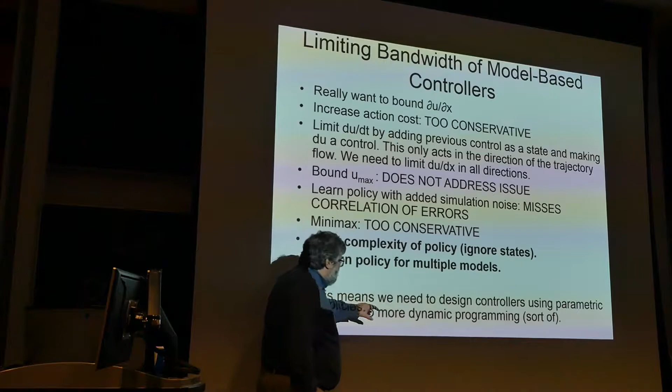What I'm going to advocate is what we should be doing is design policies for multiple models. If you design for a set of models, then hopefully you will be robust across that set. An implication of this is we have to use policy optimization, no more dynamic programming, and no more trajectory optimization, because what we're optimizing are parametric policies. And the way you do that is incredibly simple.

If you had a single model and you wanted to try out a policy, you'd run it for a certain amount of time. Maybe you'd pick a set of initial conditions and run them from all the initial conditions and average or add up all the costs. And all I'm saying is, in addition to doing that, you should sum over a set of models. Now, this is a weight that depends on how much you care about the model and the starting point, and this is a notation of the cost given a particular model with that starting point and this vector of parameters.

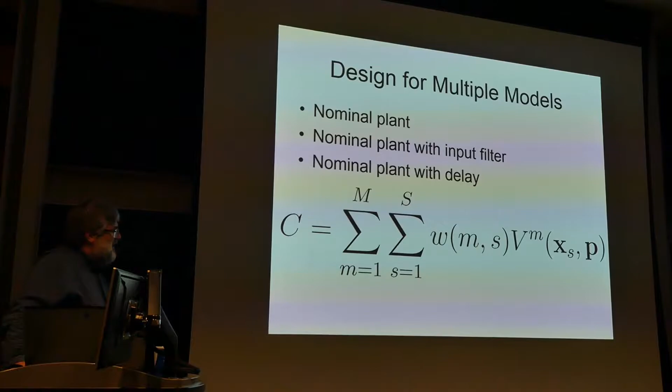And as long as there's a finite weight on all the models, yes, you can get into a fixed amplitude oscillation or something like that, but none of the models are going to blow up to infinity.

So can I ask you, now you made a big change. We went from trajectory optimization, right? Our initial and final state that we're trying to... Correct. To having a general policy. I still have a question regarding the trajectory optimization part. Do you think that if we just learn local linear models of the environment, we initialize them with local linear models, and then we try to use the learned model instead of the structured model we imposed, which may be wrong? Do you see what I mean?

You remember me swinging that thing up? That's what we were doing, learning local linear models throughout the space and then doing trajectory optimization through it. And clearly that works. It has a couple bugs. You can get into a situation where your action generates new knowledge that does not change any of the models you were actually using. So you keep doing the same thing over and over again, and so you get stuck.

A way to fix that is to add in a little bit of model-free learning where you basically use the error to directly drive or explore to generate a new command. And that usually gets rid of the problem of getting stuck. So mostly model-based learning with a touch of model-free learning is a good combination. Okay.

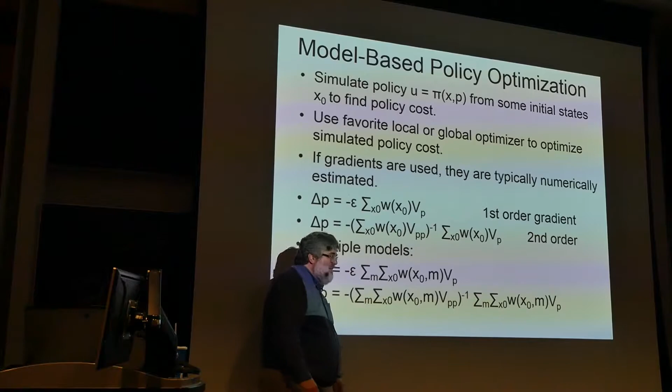So we're interested in doing this model-based policy optimization with sets of models. We can compute numerically a first-order gradient and a second-order gradient, or we could use a non-gradient optimization algorithm such as something called CMA-ES, which is very popular. The only change we do with multiple models is we add an additional sum over the multiple models. The gradient's just a sum. And in the example I gave you, the system trained on multiple models, and the nominal expectation was you would have done that.

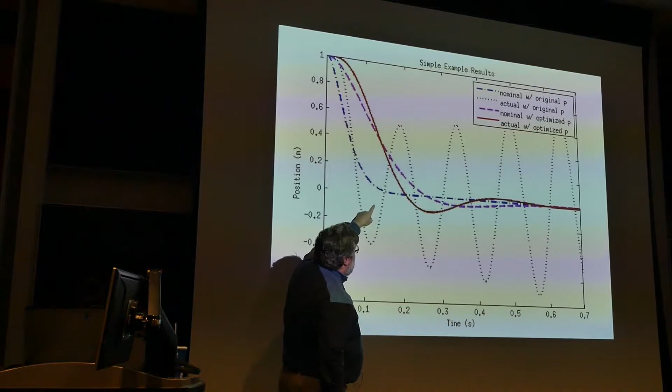When you're actually given the real system and the actuator has limited bandwidth, you do something very reasonable. You're a little oscillatory, but you're not blowing up to infinity.

Now, you might say, for n models, I have slowed down my learning process by a factor of n, which is not that bad. But if you're willing to use a model-based trajectory optimizer called differential dynamic programming, which is the granddaddy of iLQR and a lot of other algorithms, which are basically reinventions of differential dynamic programming, you can analytically propagate gradients very efficiently with local linear models. And you can handle constraints.

I'll put these slides on the web. I'm going to flip through these very quickly. You can actually compute second order derivatives or Hessians in order to do second order optimization. You can regularize these things. When you know your model's bad, you can actually add additional quantities to the second order optimization process so that you're conservative when your model is bad, which is a good thing to do.

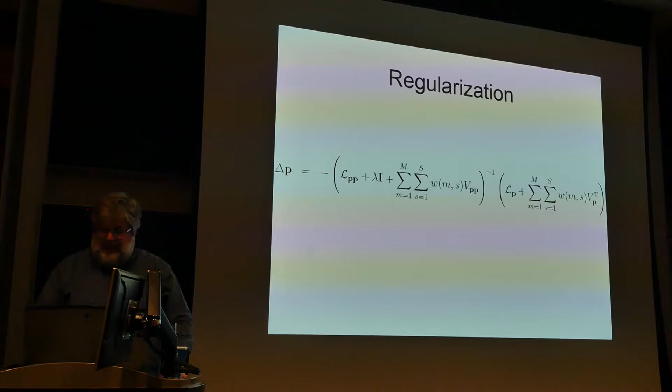All right, I'm going to skip some examples. There was a quick example where we had a linear, quadratic, bilinear regulator. I'm just going to skip that.

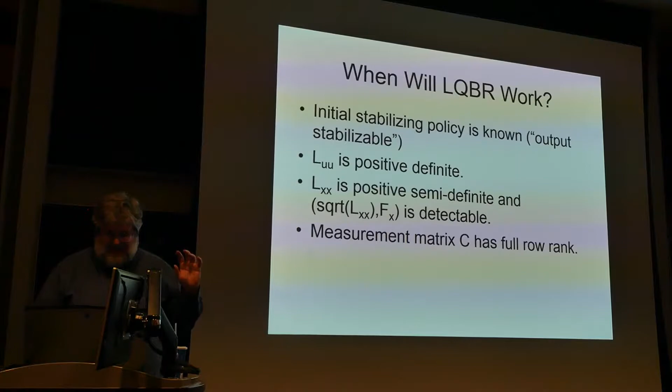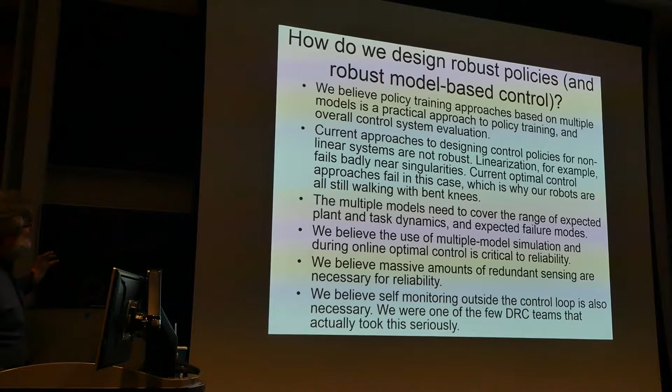Okay, so here is our manifesto about making robust policies. We think training on multiple models is a good way to go. I highly recommend it. A lot of alternatives, like finding ways to invert or cancel the nonlinear dynamics of a nonlinear system, are simply bad ideas. You need to choose the set of models you're going to optimize over very carefully.

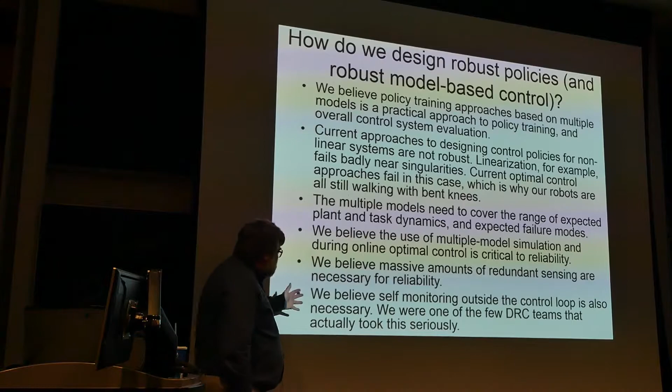We also believe massive amounts of redundant sensing are very good for reliability, and self-monitoring is also very good for reliability. We were the only team in the DARPA Robotics Challenge that did not fall down and did not need to be rescued by humans, and tried all the tasks.

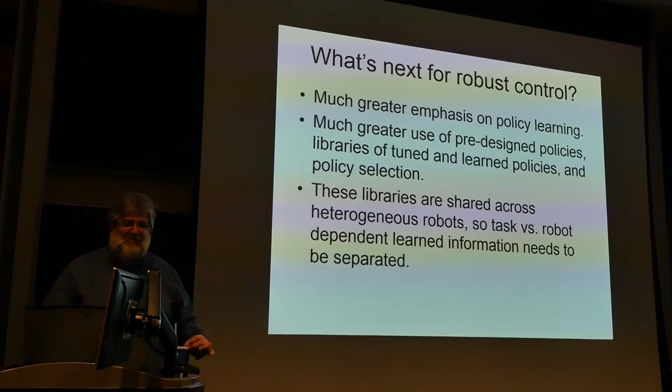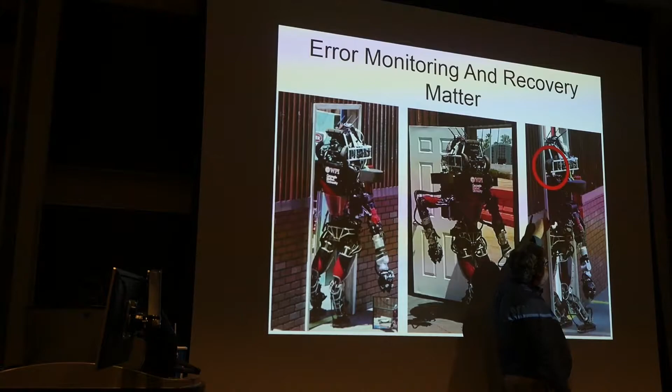And the only reason we did not fall down was we had a separate process that was looking for screw-ups. And when it detected a screw-up, it froze the robot, and the robot asked for help from the remote operator, which was allowed. So for example, the robot's trying to go through the door. Most of the time we went through okay, but one time the protective cage around the head hung up on the door frame. We detected that.

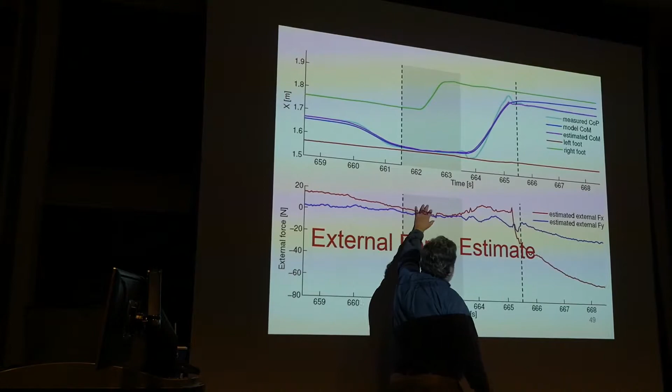So when that happened, we're always estimating an external force on the robot. That should be close to zero because we don't believe anyone's pushing on the robot. And when it suddenly changes, freeze the robot.

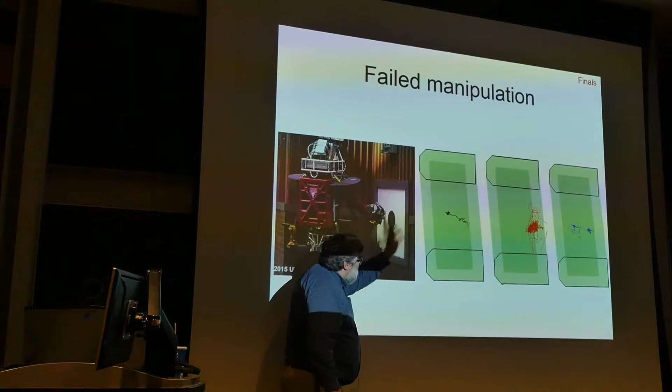Another thing we did, we were trying to drill a hole in the wall. Our wrist broke. The robot started pushing too hard. This is what's called the center of pressure. This is the polygon of support. Going outside the green area is bad. We detected that the center of pressure was going outside the green area.

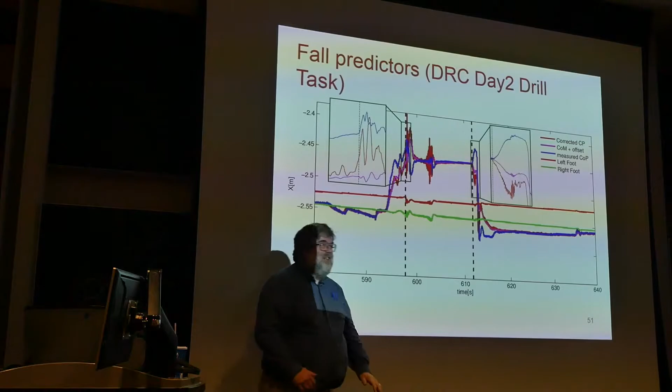We froze. While the humans were scratching their head, the robot's sort of on the edge, sort of wobbling like this. And then the human said, okay, here's what to do, and we got it balanced again. And the wiggly lines looked like this, and basically we expected that increase, but we didn't expect those spikes, and we froze the robot.

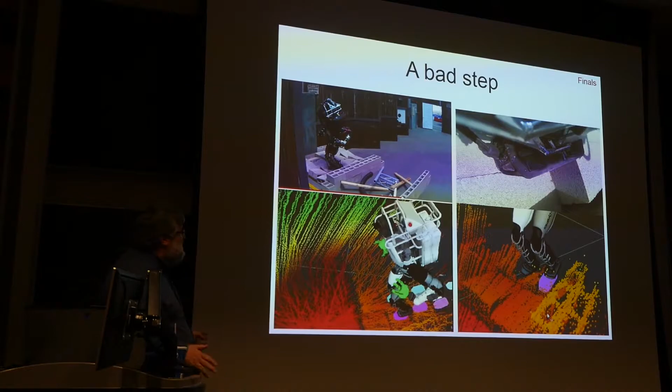Here's another example. The robot's walking across a bunch of cinder blocks, and it places its foot so the toe's on one set of cinder blocks and the heel is on another set of cinder blocks that are at a different height. So the foot's like this. That's really bad. Again, we detected, wow, this is not what we expected. Freeze the robot, ask for help. So don't just think about how to design a controller. Also think about how to monitor yourself for errors.

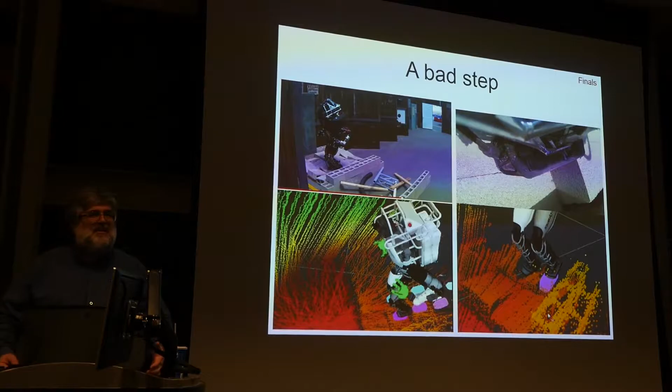Okay, now in the final section of the talk, I want to talk about what I think is the most important learning problem. And I feel it's pretty much totally ignored. And it boils down to finding better ways to do behaviors that are somehow easier.

When I was in high school, my math teacher said that I would go far in life because I was so incredibly lazy. And I spent a lot of time thinking about how to minimize the amount of work I had to do. We need lazy robots. We need robots that cheat and find easier ways to do tasks. And let me show you some examples.

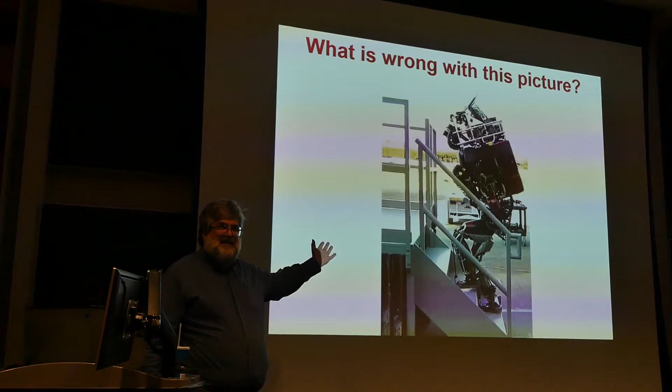This is a picture of our robot from the DARPA Robotics Challenge. We successfully walked up these stairs. This is the end of the run. We're totally happy. What is wrong with this picture? Even drunk people know to use the railing. Okay? Now, it's not that I like to dump on MIT.

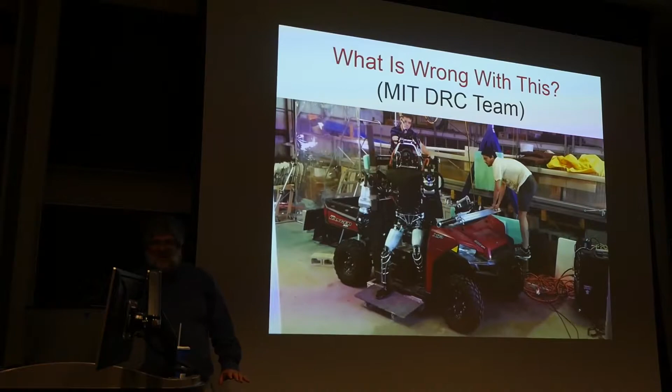The MIT team put out this video showing their robot stepping out of the car onto the platform and eventually here. I don't know how long you want to watch this. It's a little weird, kinky. The graduate students are jumping up and down, the vehicle's shaking, and the robot is very slowly standing up, and eventually gets her feet here, and eventually steps down here.

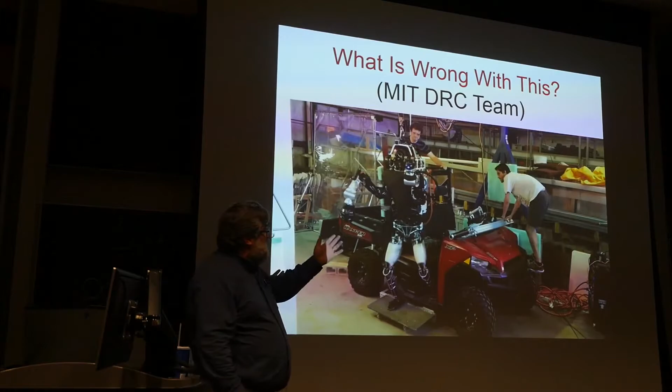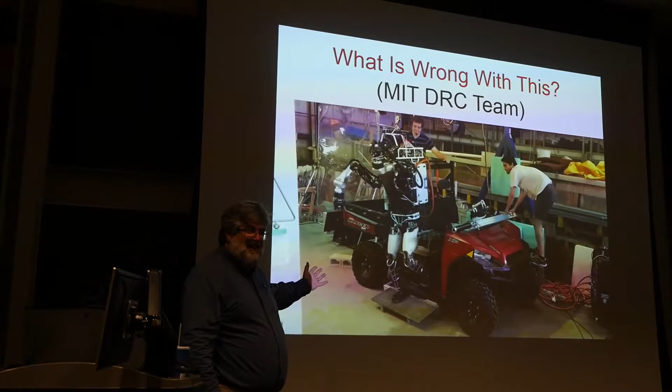This is an incredibly impressive demonstration of robot control. The thing can stand up and even move when the floor underneath it is shaking. It's amazing. These guys probably spent a year working on it. What is wrong with this picture? There's a handle. They put a handle right there.

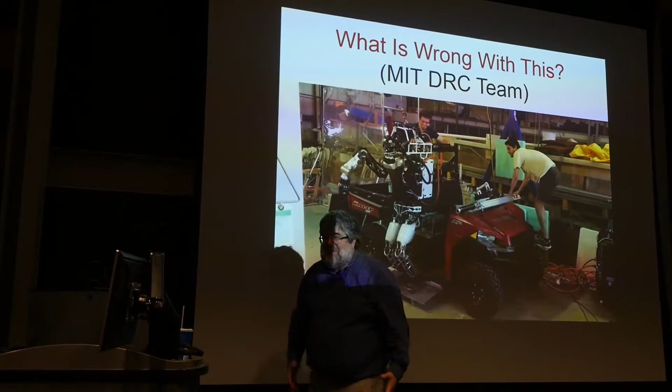It would have been so much easier if the robot just grabbed the handle. You don't have to have a $2 million robot. You don't have to have graduate students jumping up and down on the car. You don't have to have exquisite control. Just grab the handle. Okay.

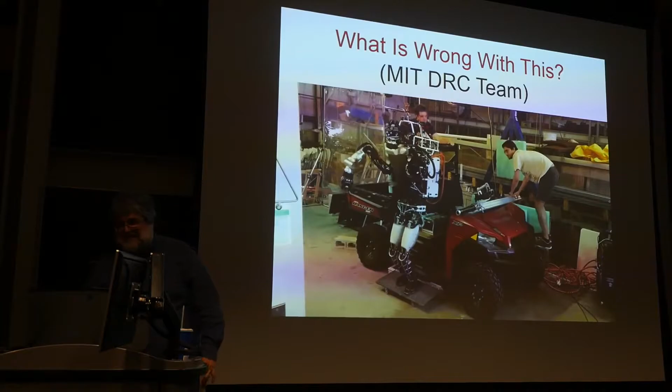A shocking fact is that no robot grabbed railings, walls, door frames, or anything else in the DARPA Robotics Challenge. A few robots, ours included, did touch things in order to get out of the car. We flung ourselves onto the hood of the car. But it's shocking that all these people work so hard to do things the hard way.

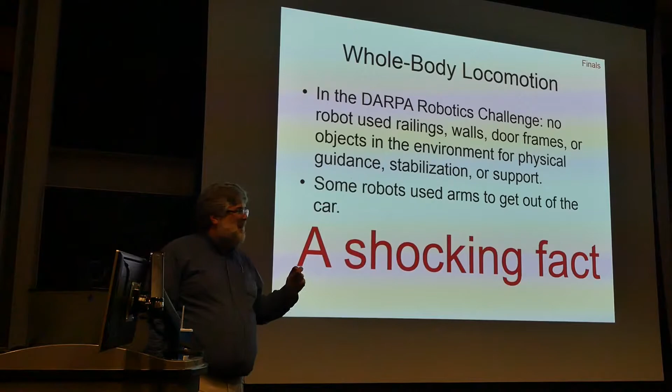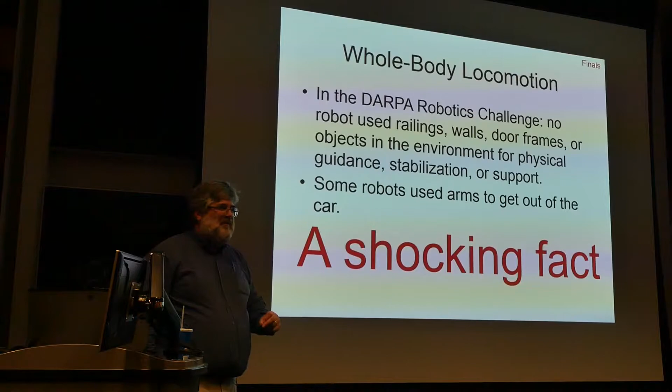And if robots could look at a problem and say, oh, the easy way to do this is such and such, robots would be as good as humans. Current robots would be just fine. Our problem is robots don't have a clue as to how to find the easy way to do something.

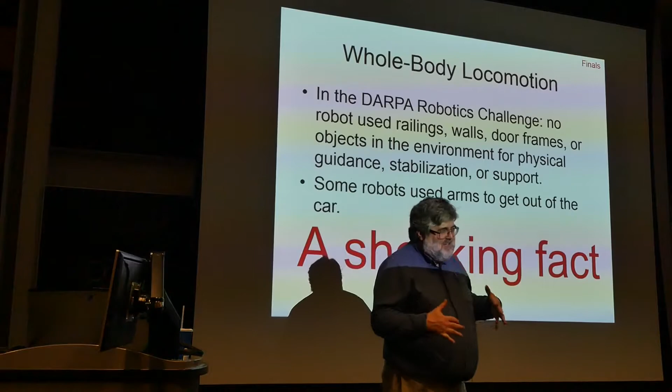Because I think this is the most important problem, I think all of you as graduate students should be working on it and drop whatever else you're doing. This is really the most important thing.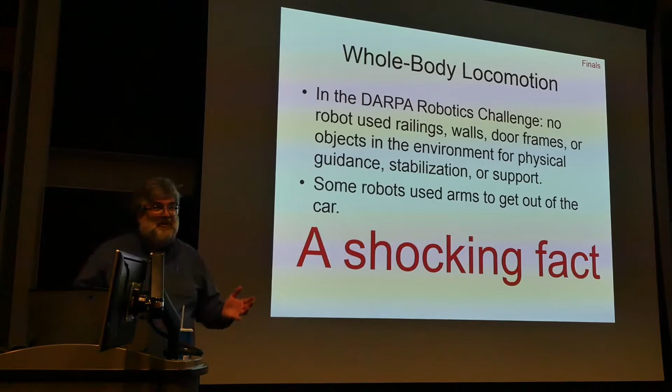Now, this may not make sense to people not from the United States. We used to have a television show called MacGyver. Recently they revived it, so I believe it's still on. MacGyver was famous for improvising ways to do tasks. And what we need to do is get a MacGyver robot. If you do anything with deep reinforcement learning, figure out how to do this.

There's just all these tricks - binder clips to hold your cords. If your screw is stripped so your screwdriver can't turn it, put a rubber band between your screwdriver and the screw. Works like a charm. Look at this trick so you can drill holes into your neighbor's cubicle and collect the dust.

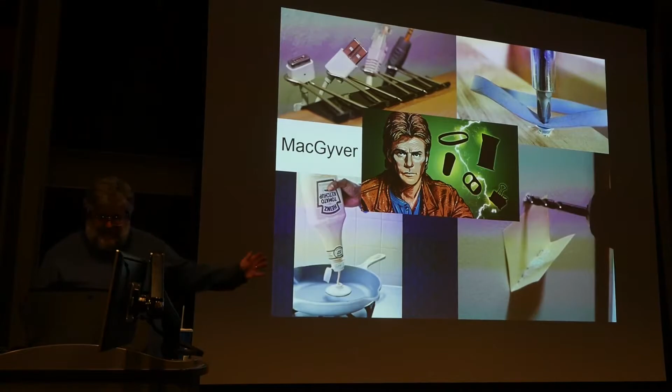That's amazing. Have you ever had the problem of putting too much pancake mix in the pan and the pancakes are too big? Put the pancake mix in a squeeze bottle and you have total control. Okay, if you're not impressed by that, here are the things MacGyver did in the original show, in the pilot.

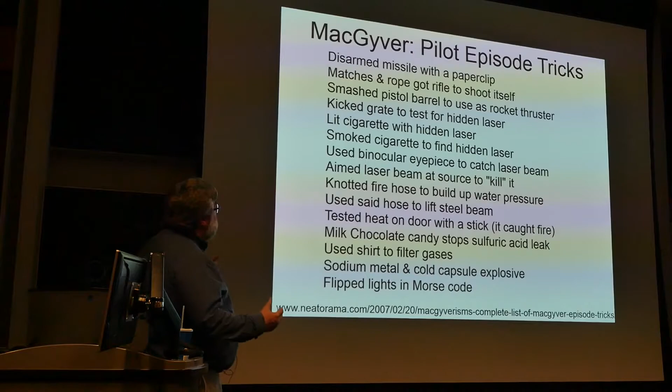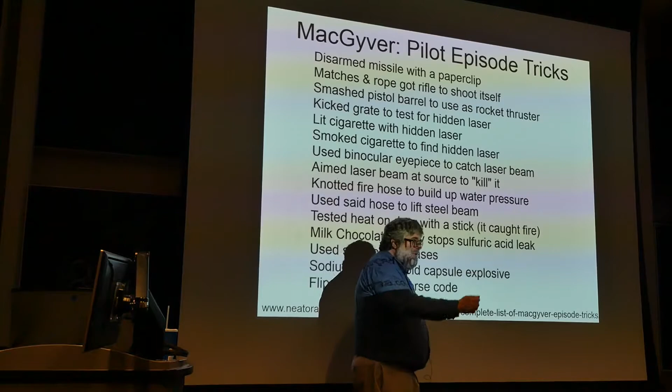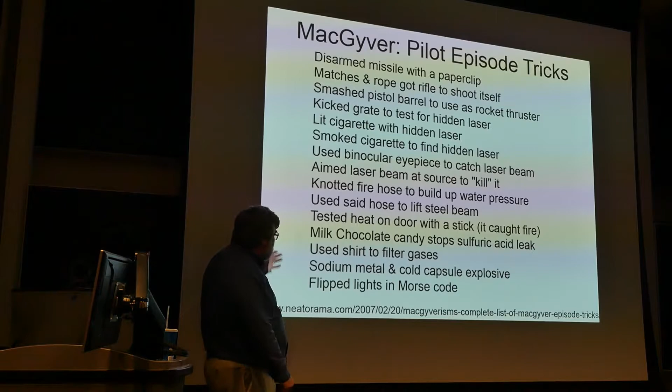He knotted a fire hose to build up water pressure and used that hose as a jack to lift a steel beam. Amazing. He tested the heat on the door not by touching it with his fingers, but by touching it with a stick. Since the stick started to burn immediately, that door was very hot. It turns out milk chocolate candy stops a sulfuric acid leak - who knew that? He used his shirt to filter gases, created an explosive out of sodium and a cold pill, and flipped lights in Morse code.

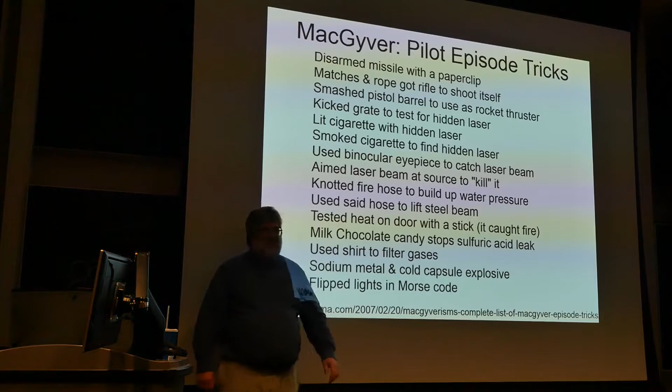And in fact, really anal retentive people have collected all the things he did in all the shows if you want to take a look.

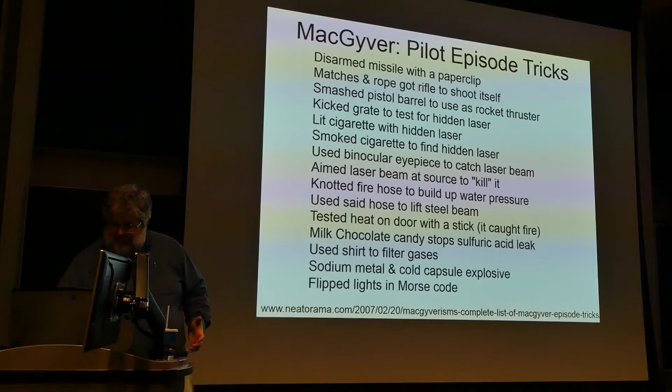Okay, so I want to explore this issue right here and now. The very tough issue we're going to talk about is how to open a jar that is stuck. Now, if you're in robotics, you'd say, well, you could use a power grip to open the jar, or you could use a precision grip to open a jar. And that's about as good as robot planning gets.

Let's talk about human planning. I want to ask you how you open jars that are stuck. So, anyone want to volunteer how you open a stuck jar? How do you open a stuck jar? Bang on the lid. Okay, bang on the lid. So my list of questions are: did you invent that strategy? Where did it come from? Where did I get it from? My mother. Excellent. All right, why does it work?

So my theory is... your theory is... oh no, that is your theory. I'm the break the seal school of thought. Okay, yeah, my theory was that it breaks the friction seal, not so much the pressure seal.

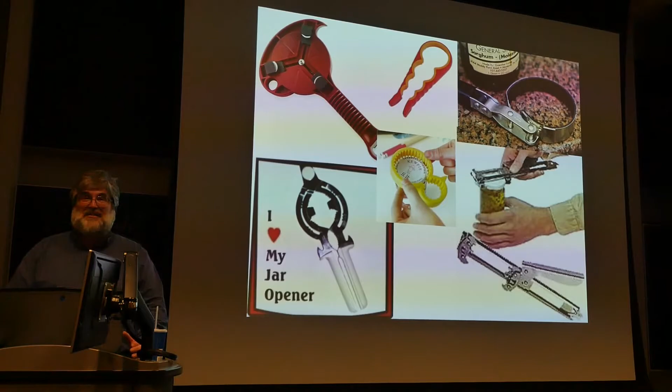There are even tools that are invented for this purpose. You can buy them. The name of this tool is a Gilhoolie. Okay.

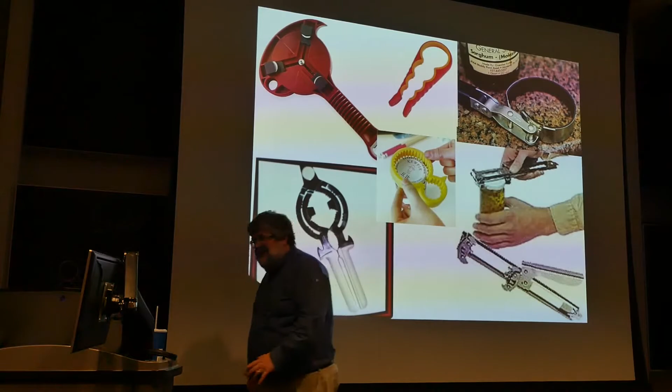You can even get power tools to do this. You know, this is from a late night infomercial. And you know, you can screw something to your cabinets to make this easy.

What's it going to take to get a robot to learn from the web and all this material? I think that's a really important question. A second question is, what's it going to take for a robot to invent these kinds of strategies rather than just learn them from imitation?

A third question is, maybe that's the wrong question. If humans don't invent these things, they learn them from other people, and we have to wait until we have an Einstein to invent a new way to open a jar, and they're very rare.

If you look at the records in sports, you will see sports records such as high jumping improve very slowly for 10 years and then jump up when an Einstein comes along and says, here's a new way to get over the bar, and then another 10 years and another Einstein comes along. People who invent new strategies are actually, I think, very rare.

So maybe that's the wrong thing to ask your robot to do. I would very much like to have a robot that could reason about physics and explain. It doesn't have to invent the strategy, but it has to make up an explanation, even if it's wrong, of why the strategy works.

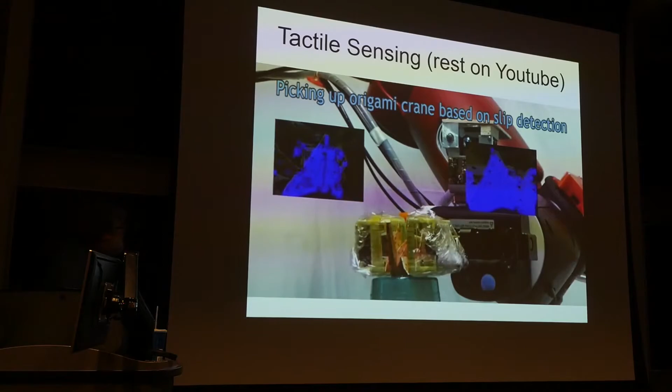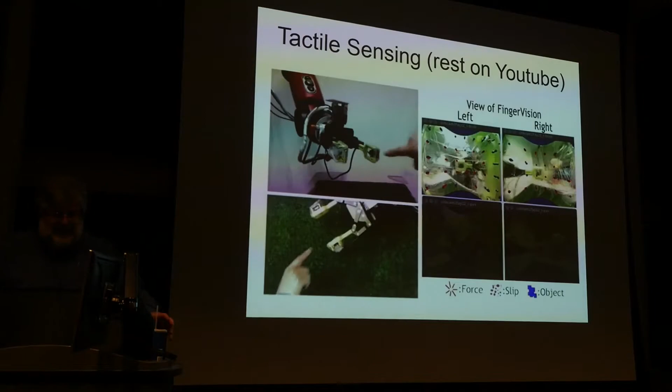Now there's a much longer video on YouTube. Here I'm showing you, yes, we can see the finger, and then when we press on it, you can measure displacement of markers, and that gives you forces.

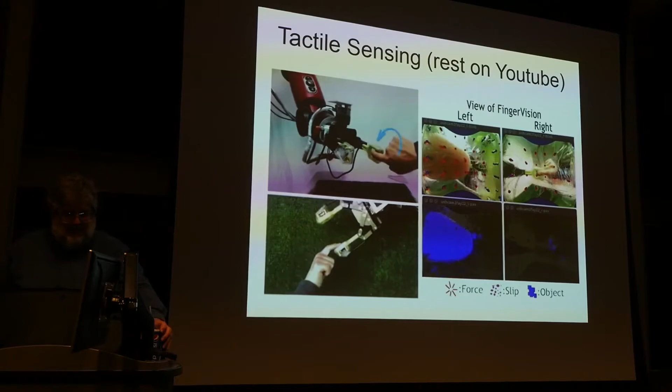You said you can pick it up because you can figure out when you're picking it up, right? That it's not slipping. You can close enough so it's not slipping, and if it starts to slip, you close more. That's a very simple algorithm. Okay, so that was my advertisement.

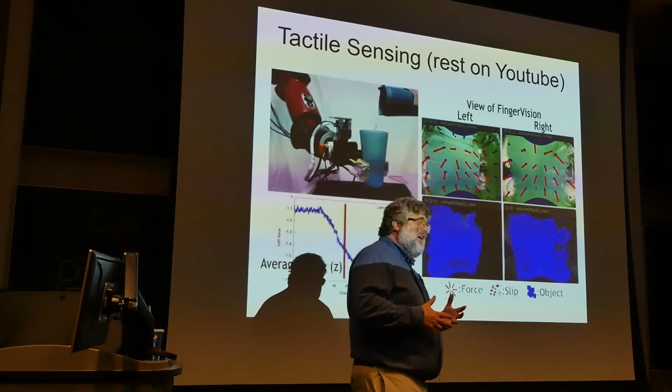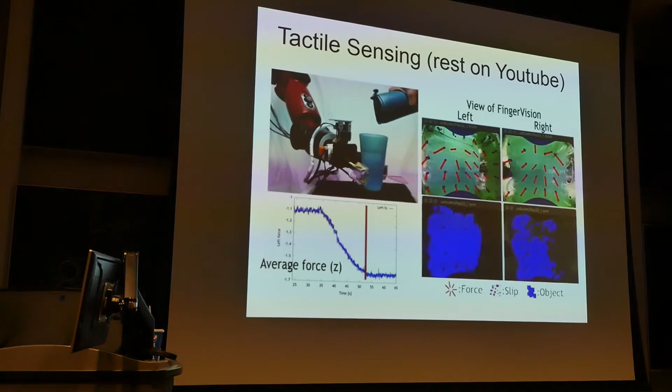Say it again, please. Is that the transparent skin you were talking about? Yes, yes, so you can see through it. I see. So you use the dots essentially as a way to... We add the dots so we have something to track on the skin.

So you can see the can through the skin, and we're using vision to look for optical flow.

There's a guy, Mark Raibert, and I wanted to tell his story. He was about 10 years ahead of me in the MIT psychology department, where we got our PhDs, and he did his thesis on learning.

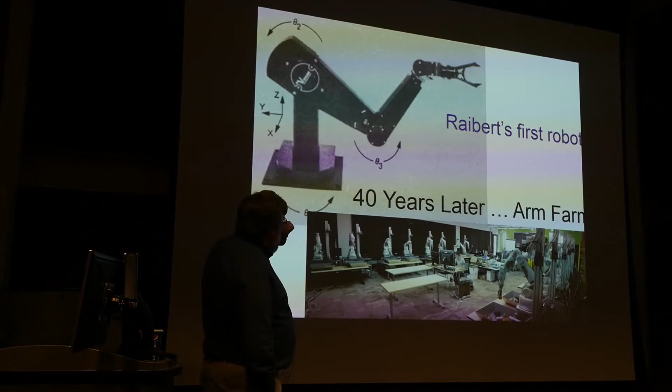This is the robot he did, from a 1978 article. He basically did the arm farm thing with one robot. He wasn't picking stuff up—instead he was figuring out how much the robot weighed, the inertial forces, all that kind of stuff. It was funny to me to see this, and then 40 years later see roughly the same thing.

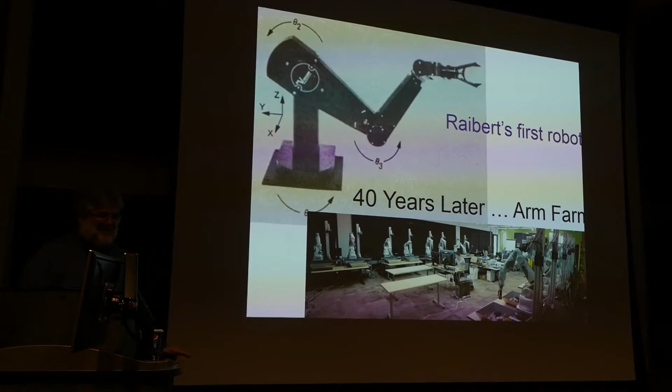Raibert, on completing his PhD thesis, swore that he would never again have a robot learn. And so far, he's kept that to be true.

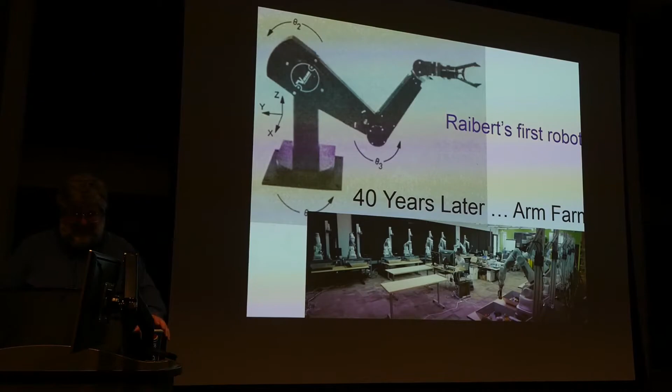You got to tell him his right hand frame is wrong. I could have screwed up the photo. This is actually what's called a Vic arm, from Victor Scheinman. So maybe Victor just defined the coordinate systems badly. But yes, that is a left-handed coordinate system.

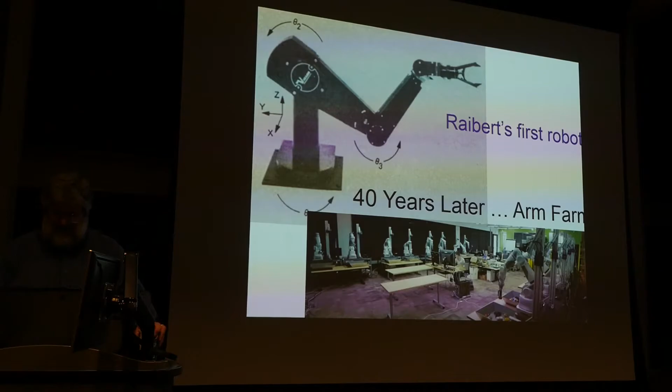Okay, let me talk about one of the big successes in deep learning, which is this grasping stuff, and raise a couple of issues there. I hope Darrell isn't here.

Here and at other places, we've put stuff on a table, and eventually a robot learns to pick it up. The argument is we can do big data approaches because amazingly enough, the Baxter robot runs for a long time without maintenance. That blows my mind. I bet we could do these experiments in simulation and do just as well—you can think of that as big simulation or big fake data. I can tell you the community of people who work with high performance robots looks at this and says, why are we investing all this research effort on essentially very crappy hands and very crappy robots? Wouldn't it be better to use higher performance robots and higher performance hands?

Okay, I wanted to end there because I hope to provoke some discussion. Any thoughts? In the same way you can learn on a crappy robot, you can learn on a high-performance robot without needing more students, just letting the robot figure it out. Apart from that, it's fantastic.

Like you were saying, inventing new strategies—people who are not healthy and have very few fingers somehow manage to manipulate a lot of things in different ways than the rest of us. So our robots should also be able to. Yes, the proof of concept is there that you can.

Why don't you make that an assignment for the class? So it'll be solved.